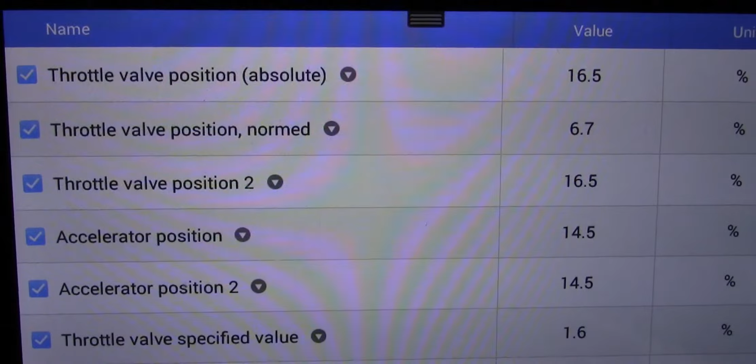Okay, back here. One thing I just realized - I have the scanner connected and I'm checking the live data. On the first line, throttle valve position absolute is 16.5, and throttle valve position norm, I'm not sure if it's sensor one or something. Also on line 3, throttle valve position 2 matches throttle valve position absolute - both are 16.5%, but on the second line, throttle valve position norm is 6.7.

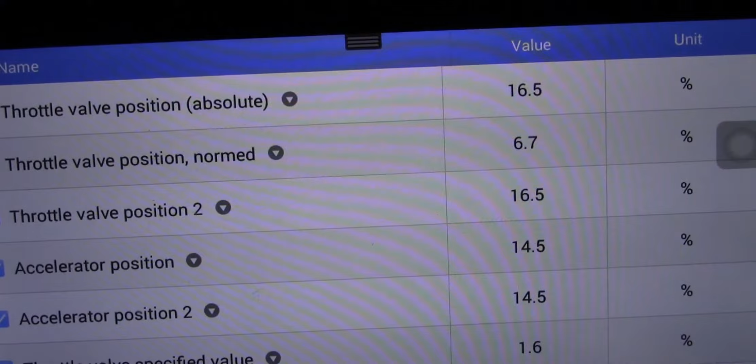So now I'm going to press the accelerator pedal down to the floor and see. The top value on the first line, which is 87.8, matches - let me show you. Sometimes it matches, sometimes not. It's 80. Look now, at the beginning both were 88.2 - the line value of line 1 and line number 3.

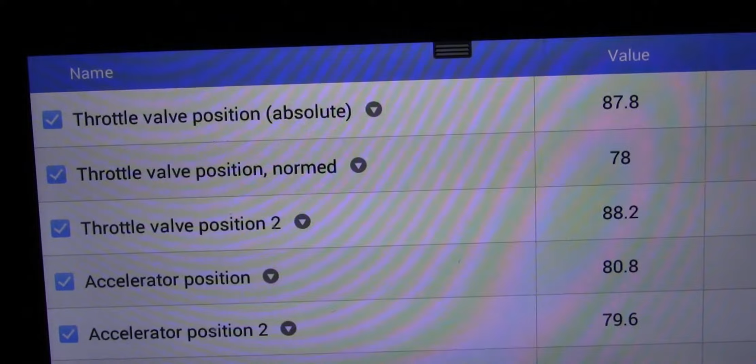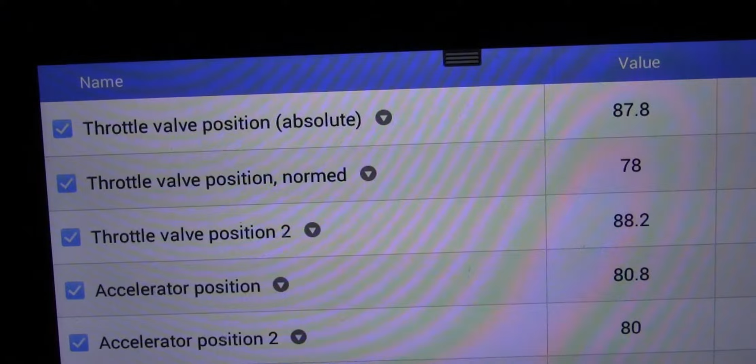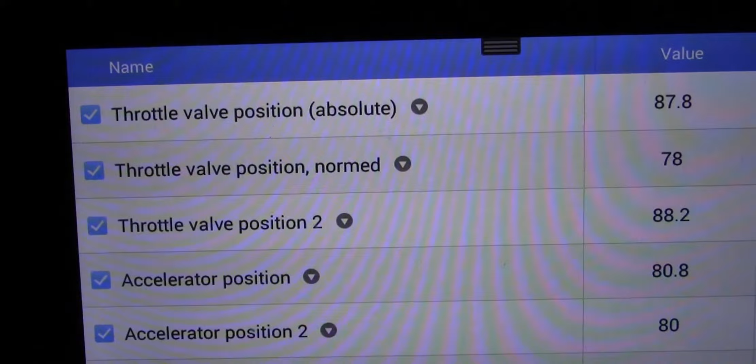The second throttle valve position norm value is 10% different. Let me press the accelerator pedal back. 88.2, third line 88.2, it goes back, jumps back to 87. So it's approximately matched now, sometimes both values look matched. But the second line is approximately 10% different from the two lines. I'm not sure if that's the problem or not, but I'm going to investigate further and see if I get a clear result.

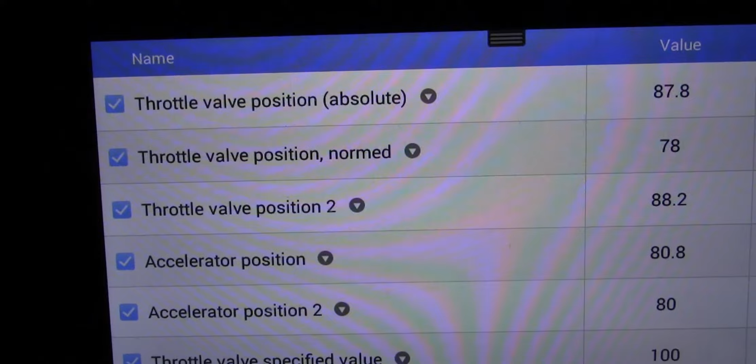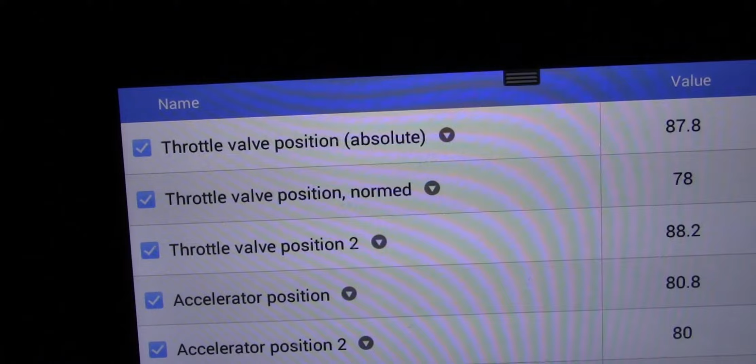So now the accelerator pedal is on the floor. Look, first line 87.8, third line 88.2. So first line 88.2 again, but the second one is 10% different from the two.

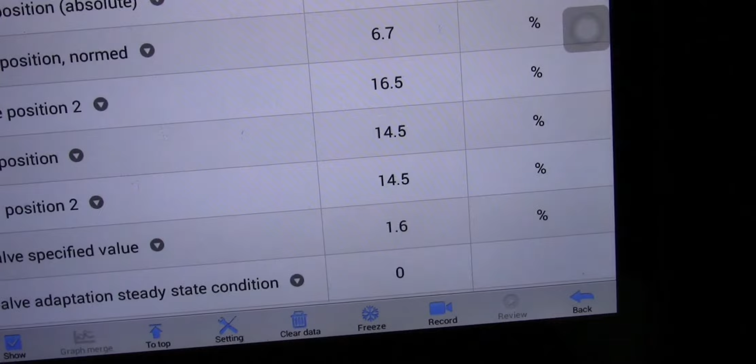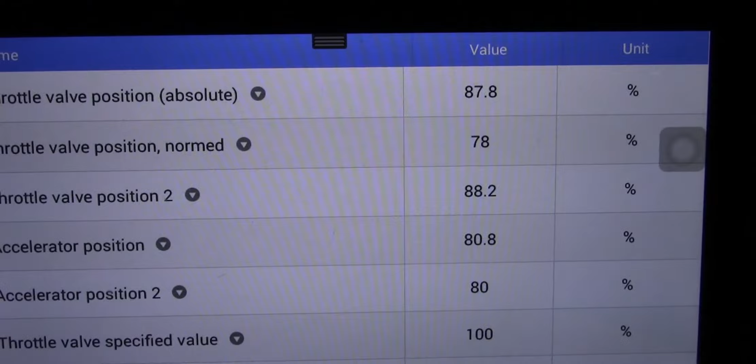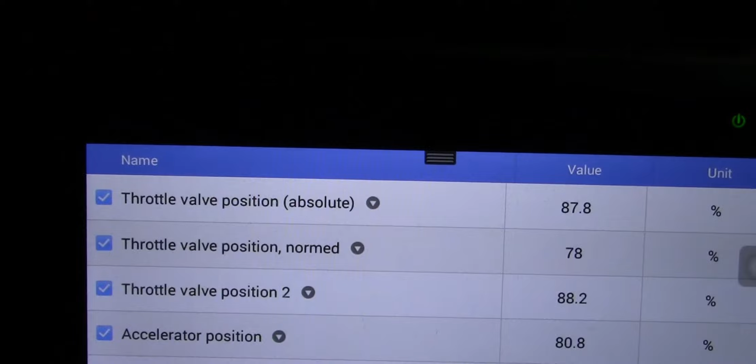So if you watch accelerator position sensor 1 and 2, both are 14.5. When I press the accelerator pedal down, look, both change approximately the same, not much difference. 80.8 and 80, but the throttle valve position norm is 78, and the two are approximately matched - line 1 and line 3.

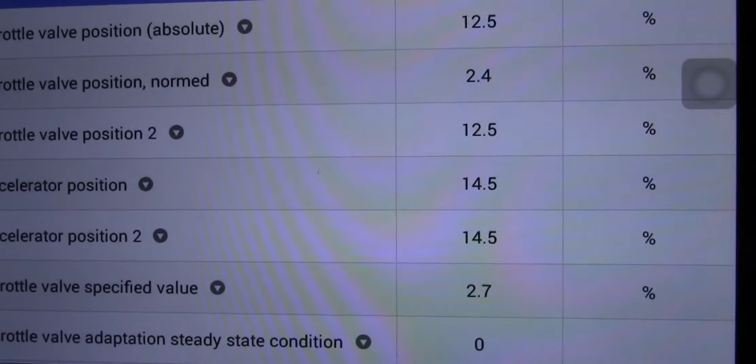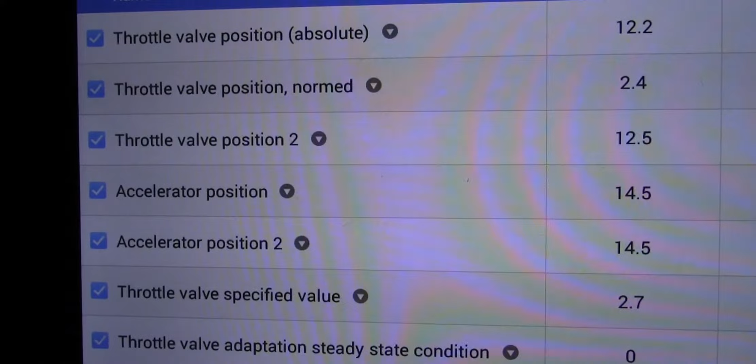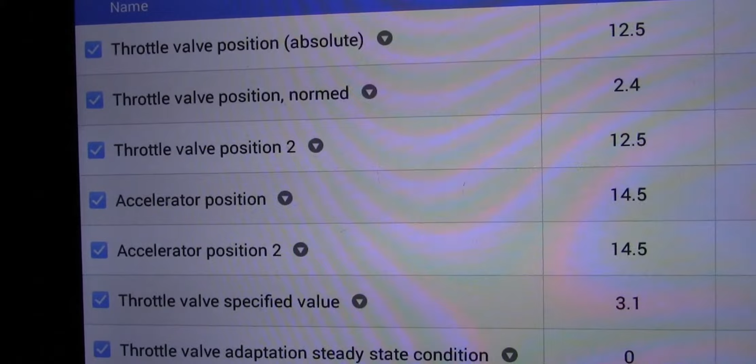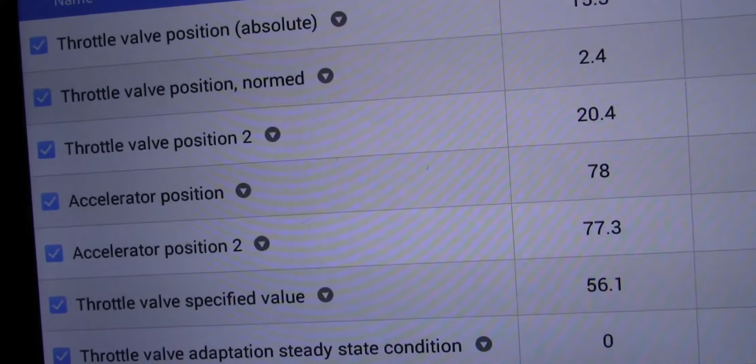Okay, with the engine running I have this value. Throttle valve position absolute is 12.2, matches 12.5, matches to the third line throttle valve position at 12.5, but the middle line between the first and third looks suspicious to me. I'm not... throttle valve specified value.

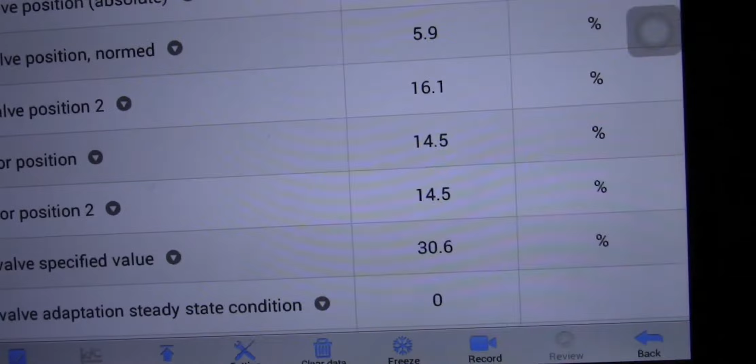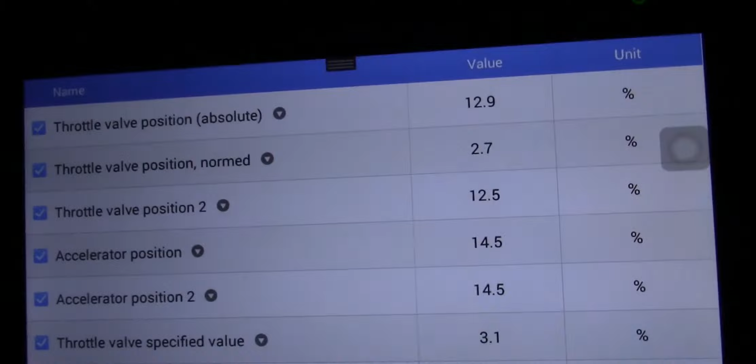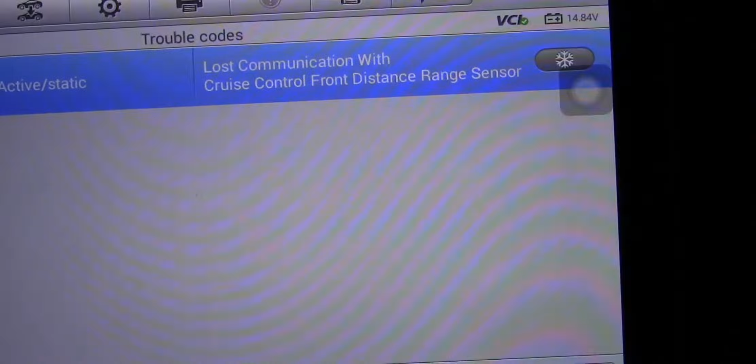Okay, quick update with you. So now the engine is idling, but as you can see, the signal of the throttle position sensor has gone down to minus 0.08, and the other one is also minus 0.08.

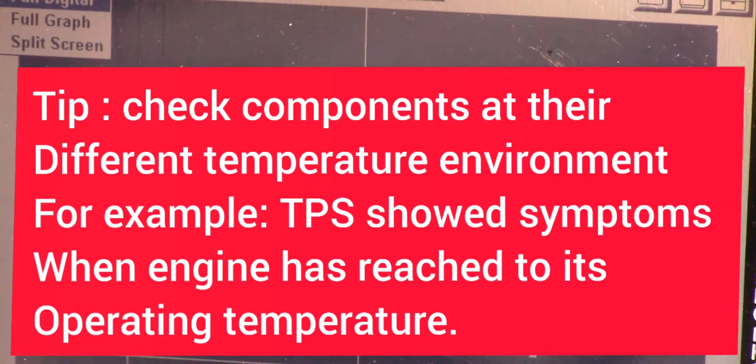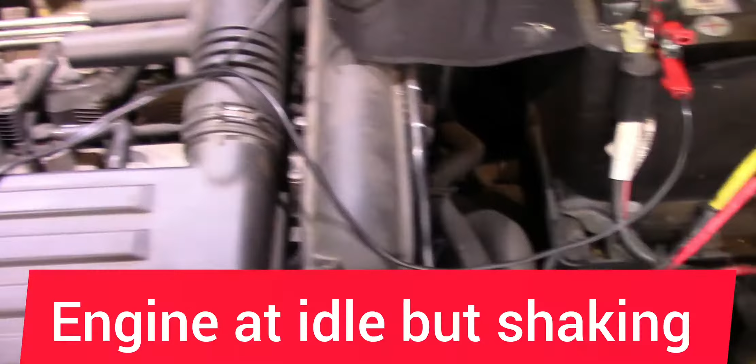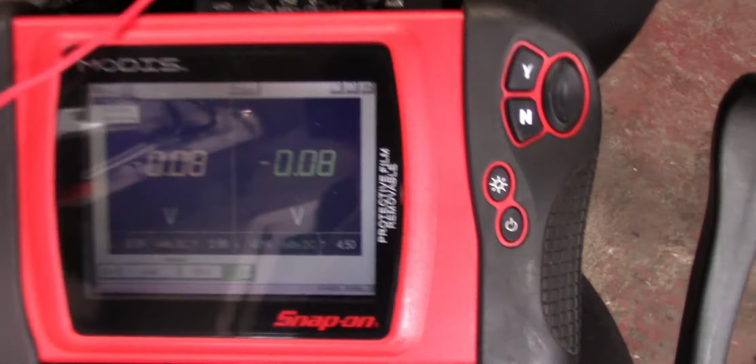Okay, as you can see, the engine is idling and also shaking. The leads are still connected to both transmitter signal wires, and the reading on the scanner is this. Now I'm going to press the accelerator pedal down and you watch.

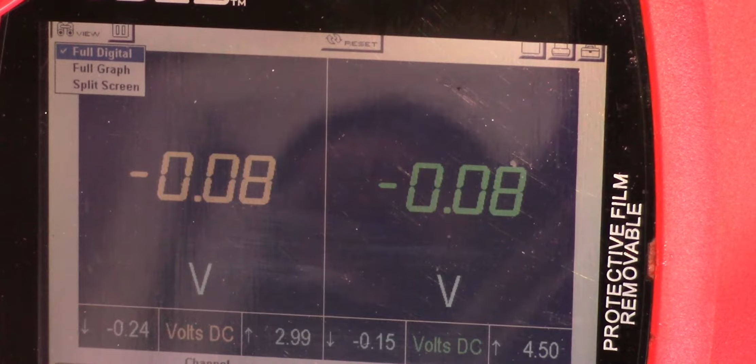Okay, now we are going to check the live data and see what's going on. These are the fault codes stored again in the memory - this is the diagnostic trouble code, or DTCs, stored in the memory bank. Now I'm going to check the live data again.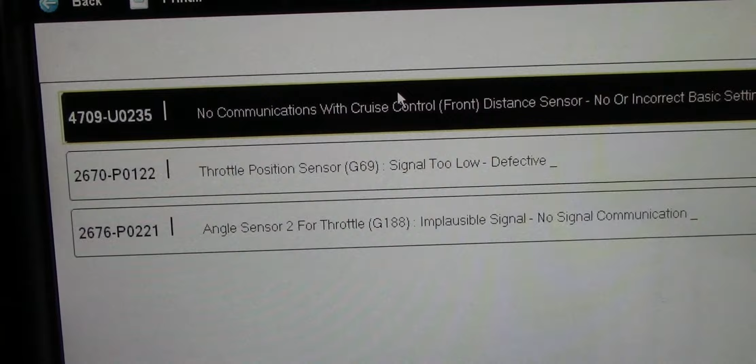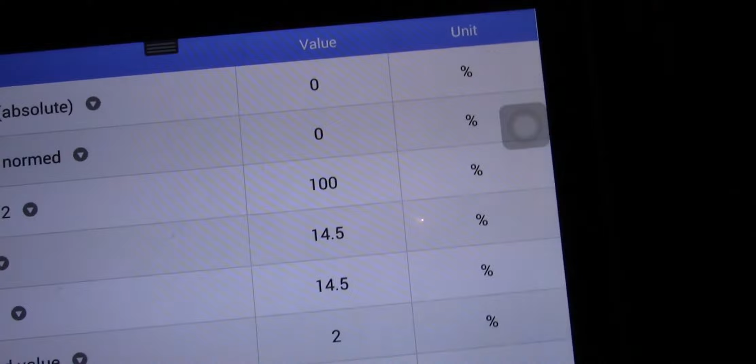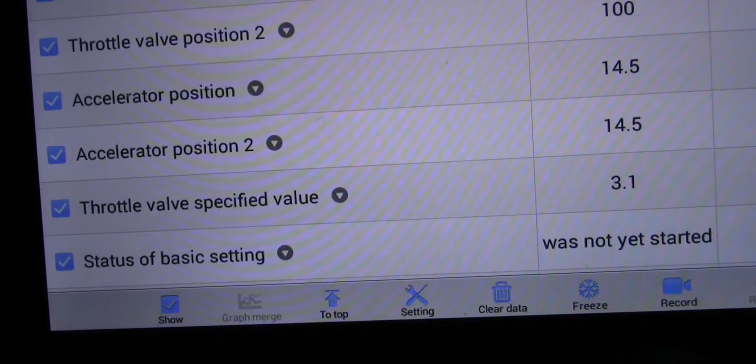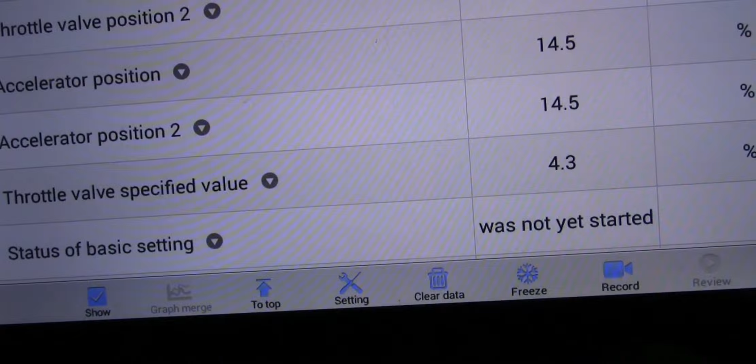Okay, this is the live data value we have got. As you can see, throttle valve position absolute is reading 0, and throttle valve position norm is 0. Throttle valve position 2 now reads 100. So that's... but the accelerator pedal position sensors are correct as it was before, and the throttle valve specified value is changing from 1.6 to 0 to 0.4, 3.5 or something like this. But this is when we checked the potentiometer position sensors - both values were approximately 0, and here's the live data, and the engine is shaking and has misfired.

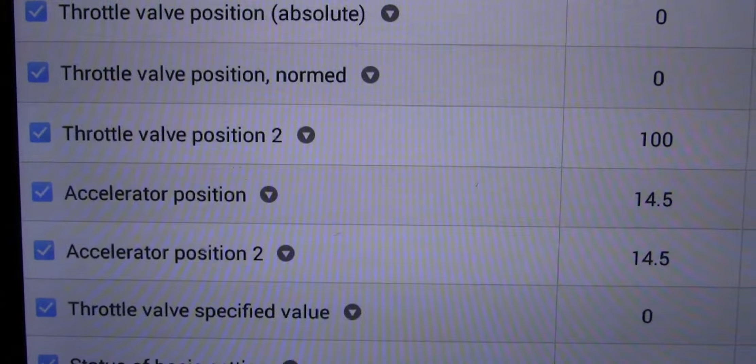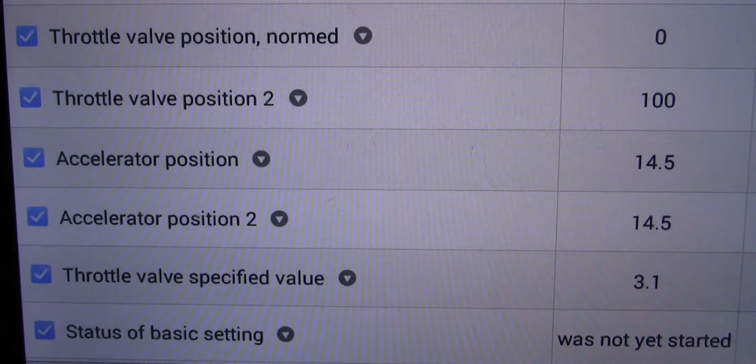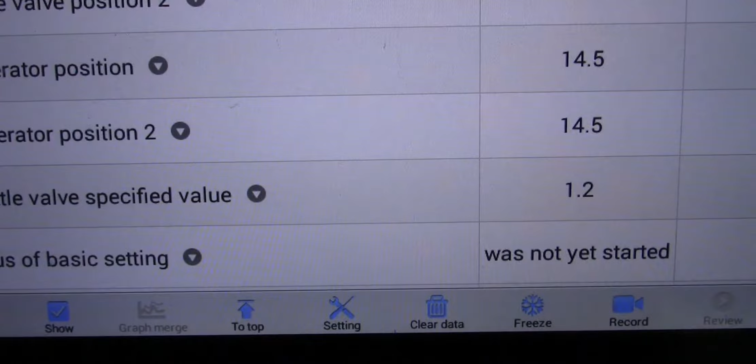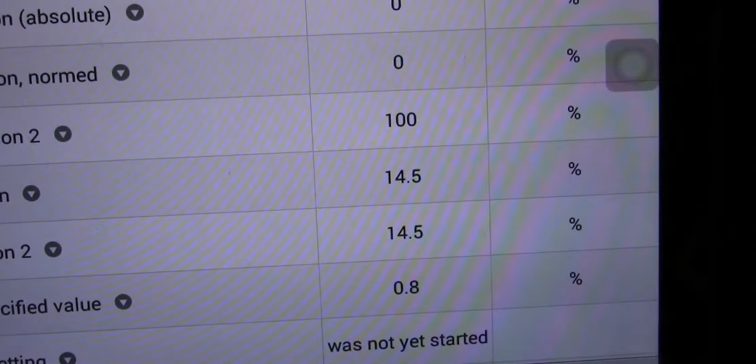This is the live data value we're receiving through the scanner: throttle valve position absolute 0, throttle valve position norm 0, throttle valve position 2 is 100%, and accelerator position 14.5, accelerator position 2 is 14.5, throttle valve specified value is this, which is changing. Also, the status of basic setting was not yet started - one thing to mention is we have carried out the basic setting of the throttle body 6 times, but it was okay for just a while, and then the same fault code stored in memory, and the engine condition changed to the same condition as it is right now.

Now the engine is misfiring, and also that EPC light is illuminated. So now I'm going to take the potentiometer wire's signal value with the voltmeter.

I'm going to see what value we can get from throttle position sensor 1 at connector 1, or throttle position sensor 1 or 2 - I'm not sure which one is 1 and which is 2 - but the signal is going to be taken from connector 1 and connector 5 of the throttle body control.

As you can see, both sensors' signal values are minus 0.08, minus 0.08. Now I'm going to turn the engine off and then turn the ignition on again, and see what value we get from the voltmeter.

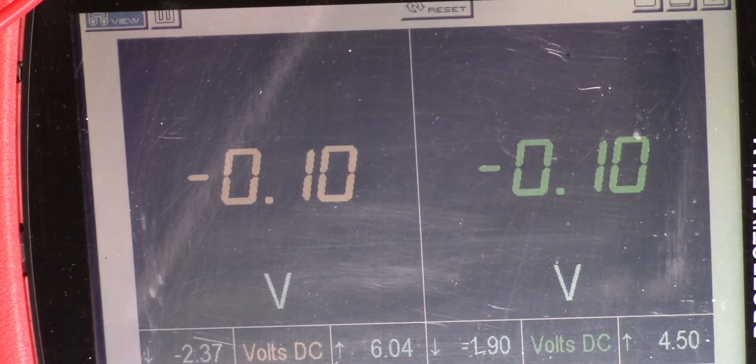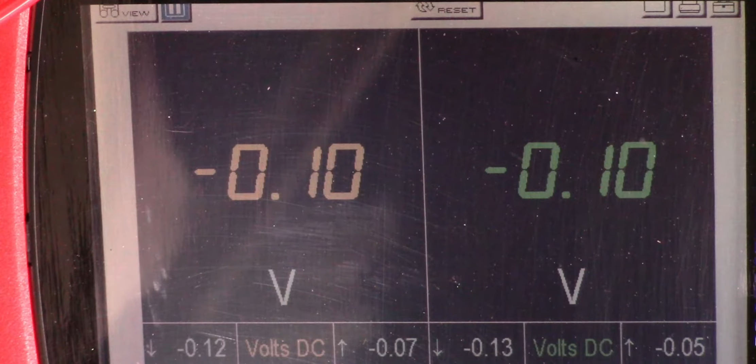With the ignition still on, I'm going to check the supply voltage, the 5-volt reference voltage from the ECU, and that's going to be on one of the channels. Let me turn it to one channel so you'll be able to see. Okay, ignition is still on, and now I'm going to prove the 5-volt reference supplied by the ECU.

As you can see, the ECU does supply the 5-volt reference, but the potentiometer sensor is not responding. So right now I've got the 5-volt reference from the ECU, and now I'm going to check the signal wire from both sensors to see if there is any voltage existing.

As you can see, I have connected the signal wire of the potentiometer sensor, and I'm taking the value of the potentiometer sensor, and there is no voltage existing.

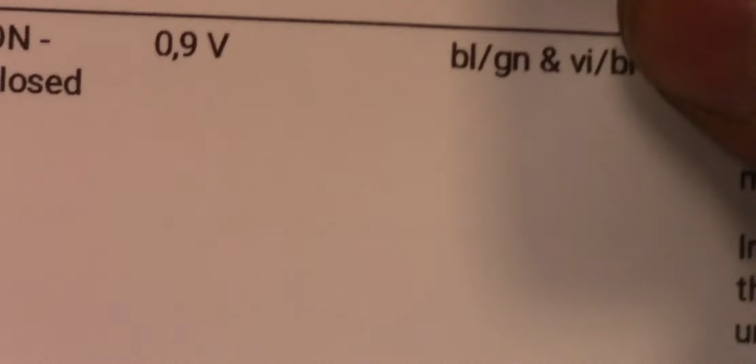So I think I have connected pin 1 and 6, which was... okay, this is one. Yeah, 1 and 6. So pin 1 is signal voltage and pin 6 is ground, and we should have 0.9, but as you can see we have minus 0.09 volt.

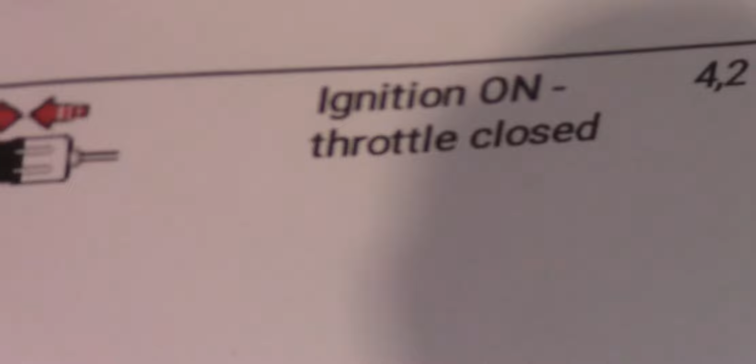So now I'm going to move the positive lead of the scanner to pin number 4, which is the signal voltage for sensor 2, and that is going to be this one. We should have, with pins 4 and 6, ignition on and throttle fully open, 0.6 volt, and with 4 and 6, ignition on and throttle closed, 4.2 volt. So now I'm going to connect 4 and 6, and you watch what value we get.

Okay, now the scanner's positive lead is probed to the sensor pin number 4, which is responsible for the signal voltage of the potentiometer. I'm not sure whether it's potentiometer sensor 1 or 2, but we should have had 4.2 here - unfortunately we have minus 0.09 volts. So we have supply voltage from the ECU, which is 5 volt.

We have a good ground from the throttle body, between the throttle body and the ECU, but both position sensors are not responding - the value is approximately minus 0.09. So for this reason we have reached the conclusion and diagnosed properly that our throttle body is faulty.

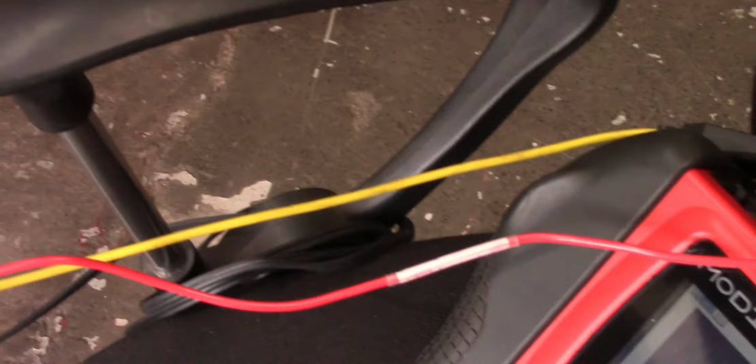Thank you. So once again I'm going to show you that this is the value you are getting from the sensor. Let me check - yeah, this is the lead connected to the sensor, and this is the sensor. This is the pin, I think you can see that this is the pin.

The red probe is connected, that's pin 4, and it's the signal wire. So let me show you - we still have ignition on, and we still have ignition on and both lights.

So if we turn the engine on, if we start the engine, we might see that the EPC light will be illuminating, plus whether the engine management light will be on or not.

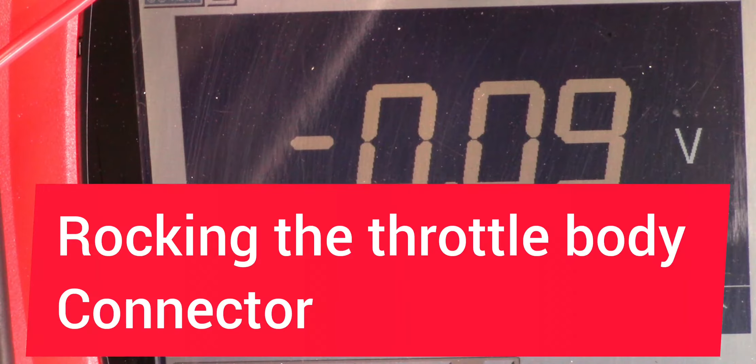You watch as I wiggle a little bit and rock the throttle body connector. You might see a change in the sensor, a change in the voltage value. See, as I'm wiggling, you can see the change.

I think that's going to be an internal contact open, or the internal contact might have an open circuit. Okay, I'm going to do one more test. While the scanner is still connected, and the voltmeter is still connected to the signal wire, I'm going to manually operate the butterfly of the throttle body and see if there's any change in the signal voltage. Okay, ignition is on, and now I'm going to operate the throttle body butterfly by hand.

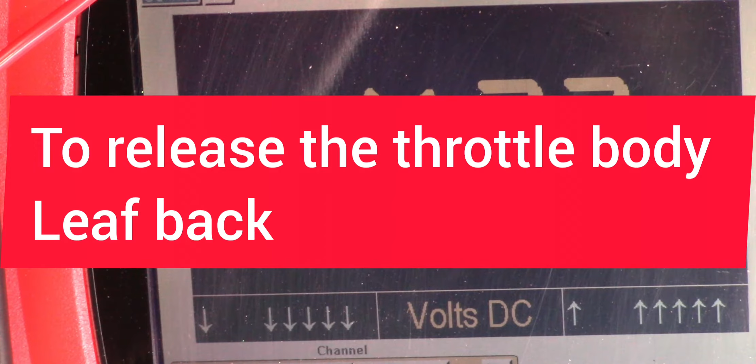Look, when I fully open the throttle body, sometimes that shows you... look now. I'm operating the throttle butterfly by hand, and as you can see, very, very small changes in the signal. Now you can see the throttle is fully open by my hand, and you can read 4.73. Now I'm going to release the throttle butterfly back, and it has returned back, and as you can see, that means

our potentiometer is faulty.

Let me do that with another sensor. So I have done that with the sensor signal pin number 4. Now I'm going to do pin number 1 as well. Sorry guys, that was actually pin number 1, I thought it was going to be pin number 4. Now I'm going to do pin number 4 right now. So now you're watching pin number 4.

Potentiometer sensor signal value. Now I'm going to operate by hand the butterfly of the throttle body, and then see. I'm operating by hand the throttle body. As you can see, there is very little change. Well, okay, now it has returned to 4.11 because sometimes when the contacts touch each other, we can see the voltage reading on the signal wire.

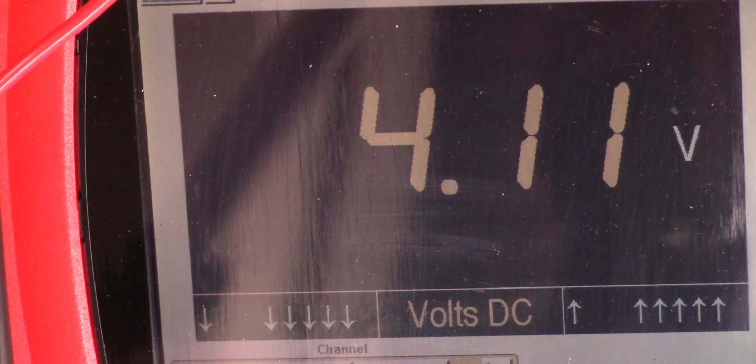So now I'm going to operate that by hand, and see, now the throttle body butterfly is completely free, and now we can see no voltage at all. So now I'm going to operate again. See, it's fully open now. No.

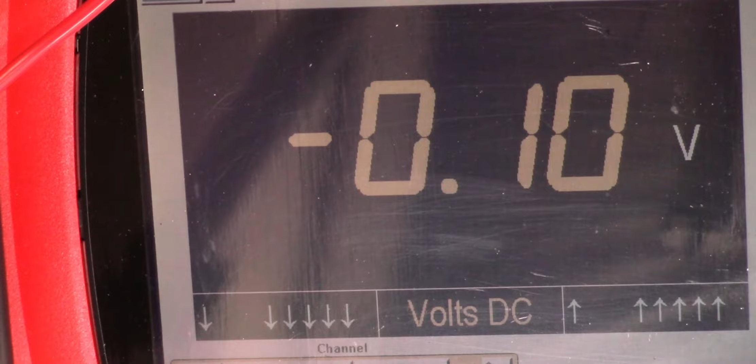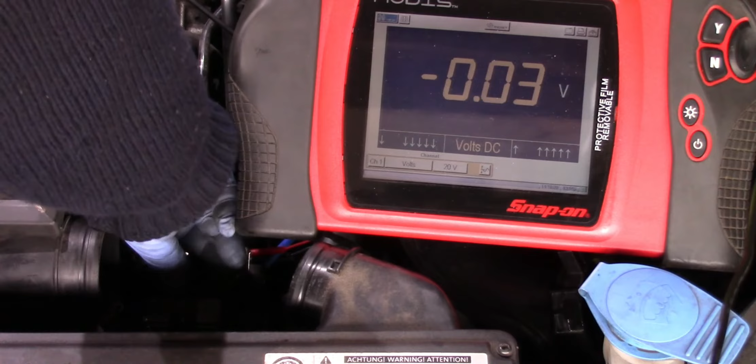So let me do that. If you can see, ignition is on. You're going to check the pin number 4 signal, so I'm operating this. Look, sometimes there is response and sometimes not. Okay, now I'm going to show you the pin number 1 wire activity as well, while I'm operating the throttle body butterfly manually.

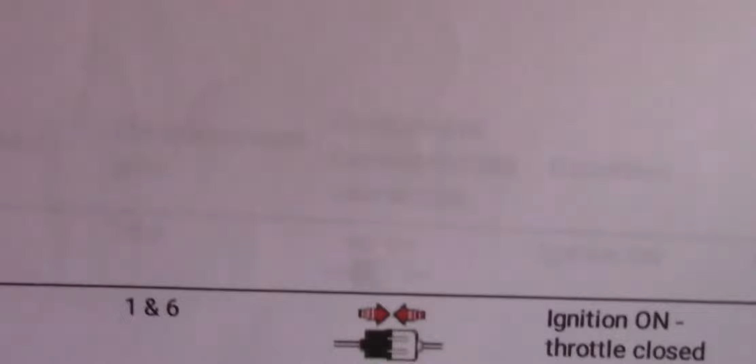So, pins 1 and 6, ignition on, throttle closed, we should have 0.9 volt. As you can see, we have nothing. So again, pins 1 and 6, ignition on, throttle fully open, we should have 4.4 volts. Watch for this activity. Now, as you can see, ignition is on, 1 and 6 are connected to this voltmeter, and we've got nothing, 0 voltage.

Now I'm going to operate the throttle body butterfly and see if we have 4.4 volts according to the manufacturer specification. Okay, throttle is open, widely open, no response, just very small activity. As you can see, look, let me push that in case we get an open. Very good.

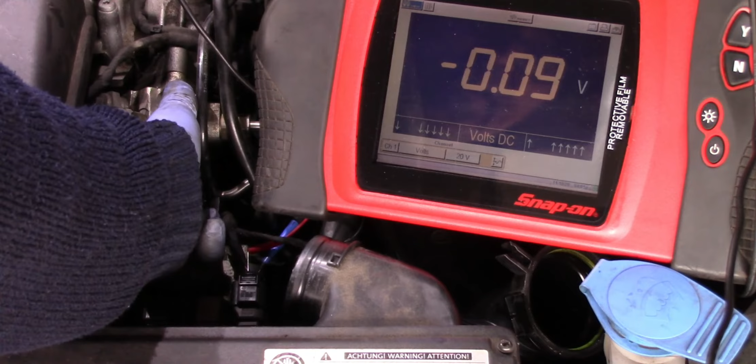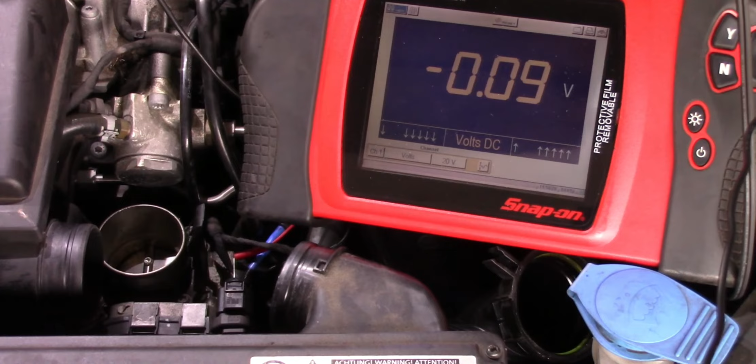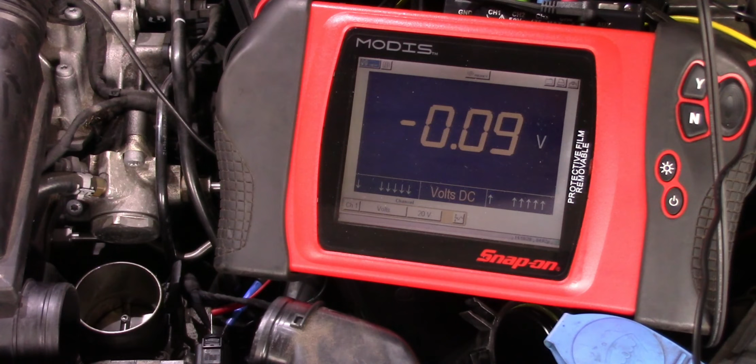Okay, now check, yeah, we have ground. So ground is connected to the voltmeter, and the probe is connected to the signal wire. But see, let me try if I am able to get some. Yeah, as you can see, I'm holding the throttle at wide open position, and as you can see, 4.75, and now I'm releasing the throttle. Look, it's a good result, because if we had spent nearly 600 pounds and the problem was somewhere else,

that would have been a disaster. So it's good that you found the problem now, and I'm going to inform the customer, and then it's up to the customer whether he is going to replace it with a genuine new one, or look for a second-hand one. Thank you.